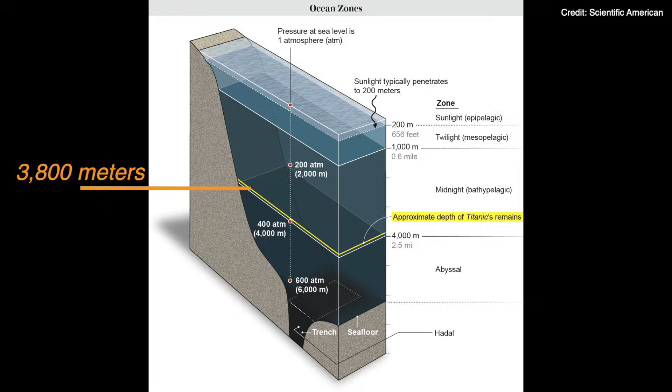The Submersible Titan was marketed as a revolution, a vessel born from the ideology of Silicon Valley: move fast and break things. But maritime engineering is governed by a different rule. Regulations are written in blood.

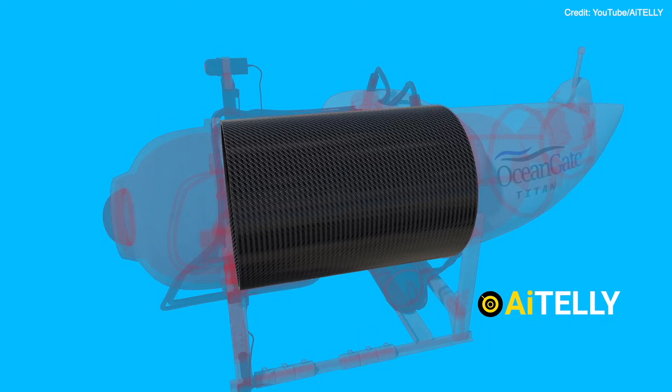This is not merely the story of an accident. It is a forensic timeline of a collision between hubris and the immutable laws of thermodynamics. It is the story of how 5 people were lost to a catastrophic failure of a pressure boundary that, according to established maritime science, should never have been built.

To understand the failure of June 18, 2023, we must look back a decade. OceanGate, founded in 2009 by 2 founders and led by CEO Stockton Rush, sought to democratize deep-sea exploration. Their initial vessel, Cyclops 1, was a steel-hulled refit. It was robust, proven, and limited to shallow depths. But Rush's ambition lay much deeper. He wanted the Titanic. Deep-sea engineering has a gold standard: the sphere.

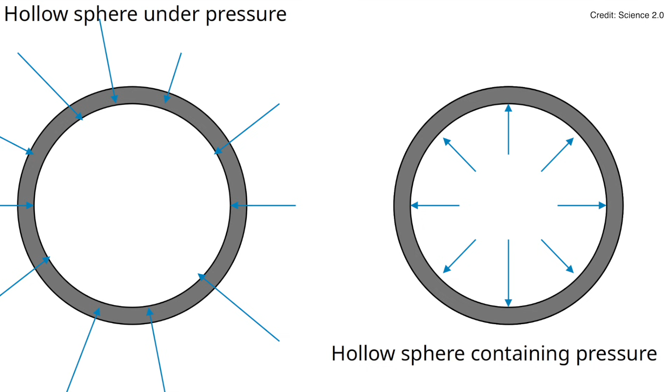Geometrically, a sphere distributes pressure perfectly evenly across its surface. It is the shape adopted by the Alvin, the Mir, and the Limiting Factor. However, a sphere is cramped. It limits passenger capacity and, by extension, ticket sales.

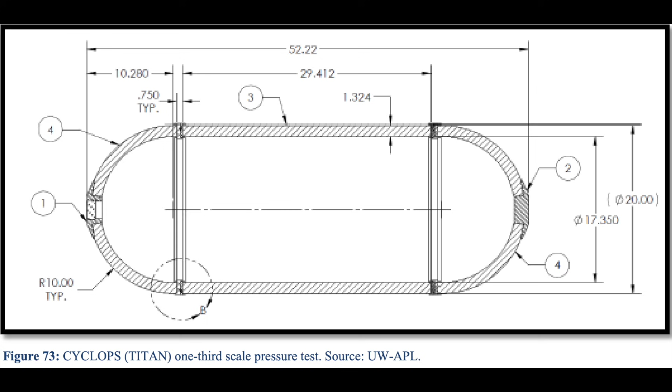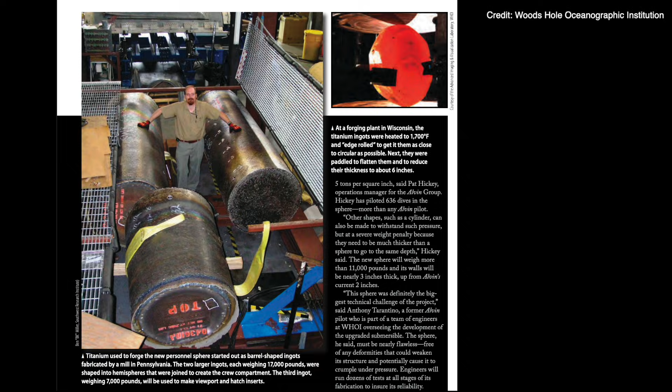To fit 5 people, a pilot and 4 mission specialists, OceanGate needed a cylinder. But at extreme depths, cylinders suffer from uneven stress distribution. To counter this, traditional engineering demands heavy titanium or high-yield steel. Rush, however, wanted the vessel to be neutrally buoyant and easy to launch. He turned to a material unproven for deep-sea compression: carbon fiber.

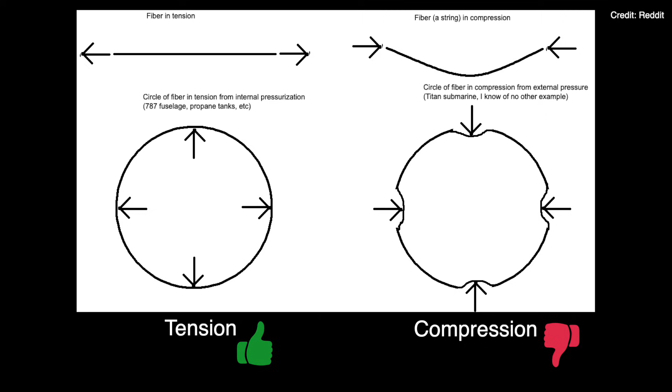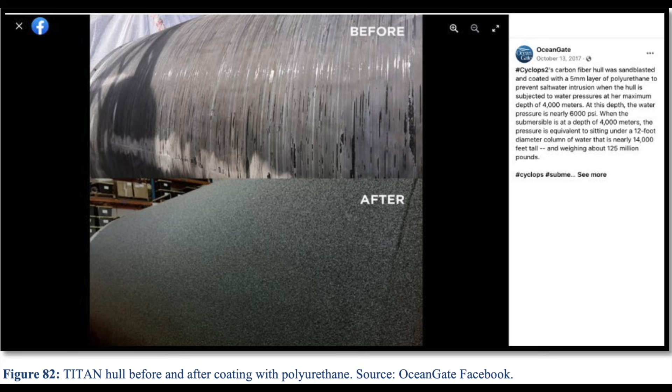Carbon fiber is a miracle material in aerospace, where it excels at handling tension, being pulled apart. But a submersible hull is under compression, being crushed inward. Using carbon fiber for a pressure vessel at 4,000 meters was not just unconventional. It was an experimental deviation from all classification society standards.

The warning signs were not subtle. In 2018, OceanGate's Director of Marine Operations, David Lochridge, authored a scathing report. He identified a critical flaw: the inability to non-destructively test the carbon fiber hull for delamination, the microscopic separation of layers deep within the material. Lochridge argued that without these tests, the hull was a ticking clock. He refused to sign off on manned tests. In response, he was fired.

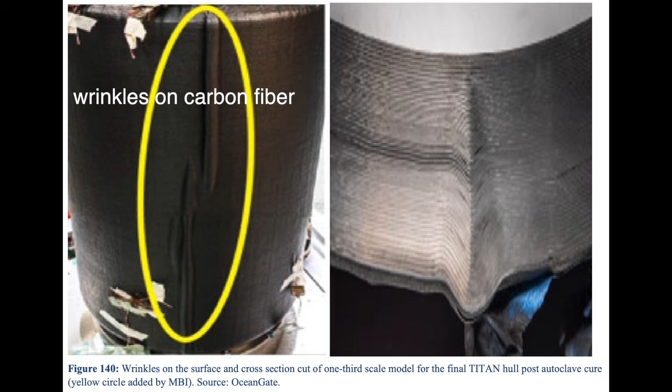Soon after, a letter from the Marine Technology Society, signed by dozens of industry experts, warned Rush that his experimental approach could result in a catastrophe. Rush dismissed these concerns as industry gatekeeping, stating that classing is not sufficient to ensure safety. Investigations revealed that the carbon fiber used for the hull was reportedly sourced from expired aerospace stock, material that had exceeded its shelf life for airplane use. OceanGate was betting lives on the assumption that what wasn't good enough for the sky was somehow sufficient for the crushing depths of the abyss.

June 2023. The support vessel Polar Prince departs St. John's. The atmosphere on board is a mix of high-stakes adventure and casual tourism. This was not a military operation. It was a commercial transaction.

5 souls prepared to board the Titan. Hamish Harding, a British aviation tycoon and seasoned explorer who had previously visited the Mariana Trench. Shahzada Dawood, a prominent Pakistani businessman, and his 19-year-old son Suleiman. Reports suggest Suleiman was hesitant, joining the expedition primarily to please his father over Father's Day weekend.

Paul-Henri Nargeolet, known as Mr. Titanic, a veteran French diver with over 30 dives to the wreck. His presence lent the operation a veneer of legitimacy. Why a man of his experience trusted the experimental hull remains one of the tragedy's most haunting questions. And finally, Stockton Rush, the architect of the vessel and the pilot for this mission.

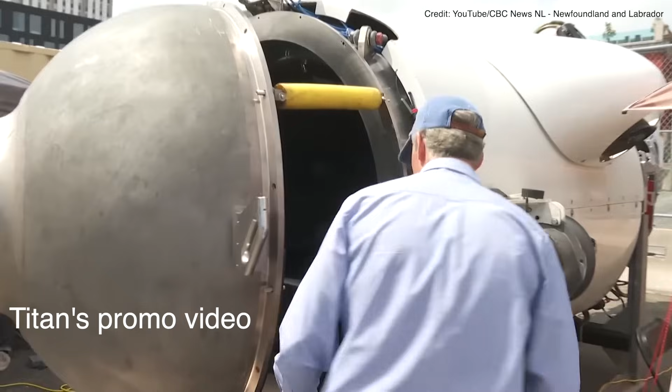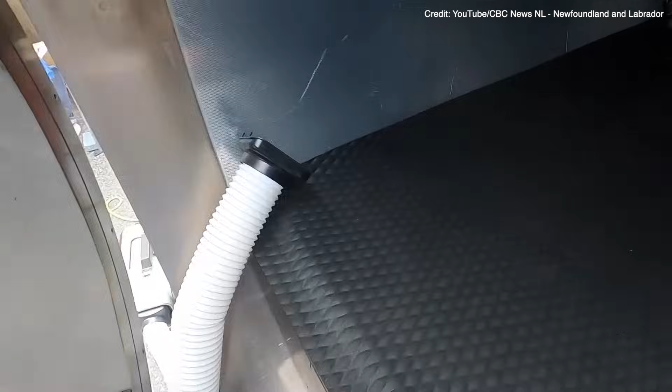Communication with the surface is maintained via text messages sent through an acoustic modem. There is no GPS underwater. The pilot relies on text instructions from the Polar Prince to navigate. For the first 90 minutes, the logs, released during the 2024 Marine Board of Investigation hearings, show a routine descent. All systems nominal.

Approximately 1 hour 30 minutes into the descent. Depth, around 3,300 meters. The pressure is now exceeding 330 atmospheres. The carbon fiber hull is compressing, shrinking by fractions of an inch. This is the hysteresis effect, the material straining under the load.

Suddenly, the Titan's proprietary real-time health monitoring system, the RTM, detects an anomaly. This system was designed to listen for the acoustic signature of cracking fibers. Rush had claimed this system would give the pilot enough warning to arrest the descent and surface. Evidence suggests the acoustic sensors began registering a crescendo of micro-failures. The hull was speaking.

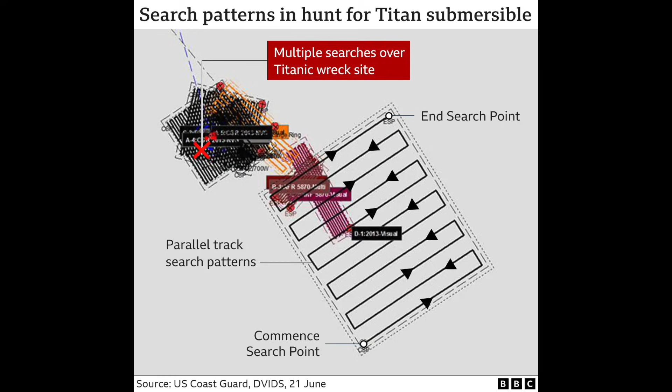But this narrative contained a fatal flaw. It assumed the pressure boundary was intact. The search covered thousands of square miles, and sonar buoys were dropped, listening for any sign of life.

Then came the banging noises. On day 2, sonar buoys detected rhythmic sounds, reportedly in 30-minute intervals. The media seized on this as evidence of human intelligence, survivors tapping on the hull, adhering to SOS protocols. It was a moment of profound hope for the families.

However, subsequent analysis by the Navy and Coast Guard debunked this. The ocean is a noisy place. The sounds were consistent with biological noise, whales, or the mechanical clatter of the search vessels themselves. The 30-minute interval was a pattern imposed by human bias, seeking order in the chaos. There was no one tapping. The silence had been absolute since Sunday morning.

Thursday, June 22nd. The oxygen clock had theoretically run out. The ROV Odysseus 6K reached the seafloor, 3,800 meters down. Within hours, the cameras picked up an unnatural shape in the silt. The debris was about 500 meters from the Titanic bow. It was the tail cone of the Titan.

Crucially, the pressure hull was missing. The debris field contained the titanium end caps, the landing frame, and fragments of the carbon fiber shell. This pattern confirmed the worst-case scenario: a catastrophic structural failure. We must pause here to understand the physics of this event.

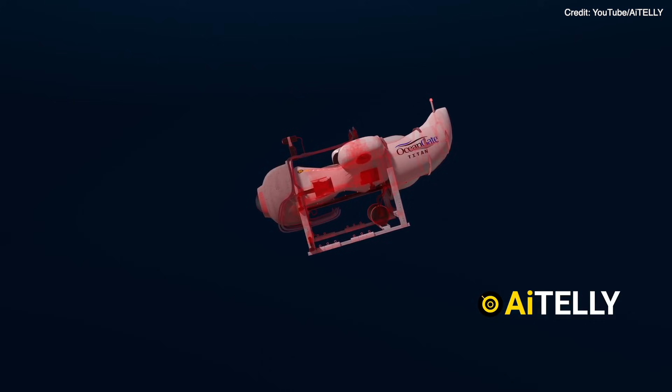When the pressure boundary failed, the external water pressure, roughly 6,000 psi, rushed in. The collapse of the hull happened in less than 1 millisecond. To put that in perspective, the human brain requires approximately 13 milliseconds to process visual information. The spinal cord requires even longer to register pain. The air inside was compressed adiabatically, generating extreme heat for a fraction of a second.

For the 5 men on board, there was no drowning. There was no suffering. Their existence ended before their nervous systems could even transmit the signal that something was wrong. It was a mercy of physics in an otherwise merciless event.

The recovery of the biological evidence and the wreckage marked the beginning of a forensic deep dive. The 2024 Marine Board of Investigation hearings laid bare the engineering realities that OceanGate had obscured. The primary culprit was inadequate engineering leading to delamination and buckling.

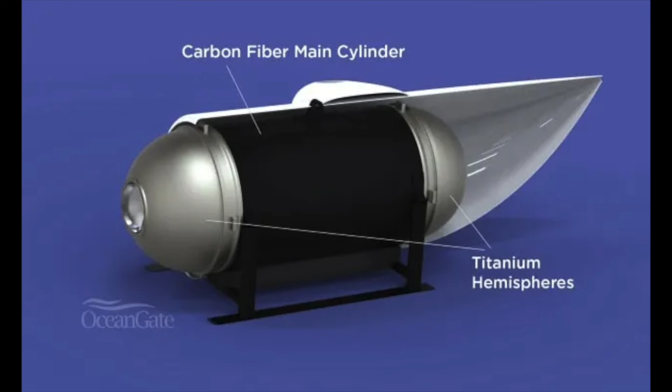Unlike steel or titanium, which can endure repeated pressure cycles if they stay within their elastic limit, carbon fiber composites degrade. Every time the Titan dived, the hull was compressed. When it surfaced, it expanded. This cycle caused micro-buckling in the epoxy matrix holding the fibers together. With each dive, the hull became weaker.

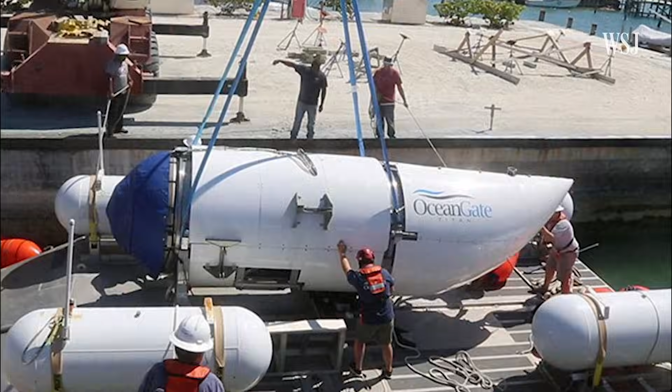Testimony revealed that on previous dives, the pilot and passengers had heard loud cracking or gunshot-like sounds. Rush dismissed these as the hull settling. In reality, these were likely the sounds of irreversible structural damage, delamination.

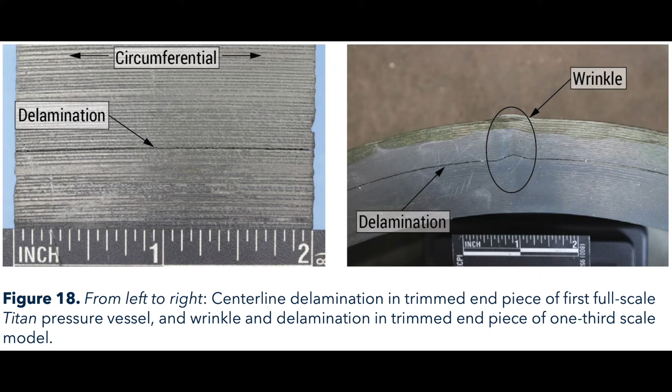Furthermore, the interface between the titanium rings and the carbon fiber tube was bonded with a specific industrial glue. The MBI investigation highlighted that the different expansion rates of titanium and carbon fiber created shear stress at this bond. Water intrusion at this seam may have initiated the collapse.

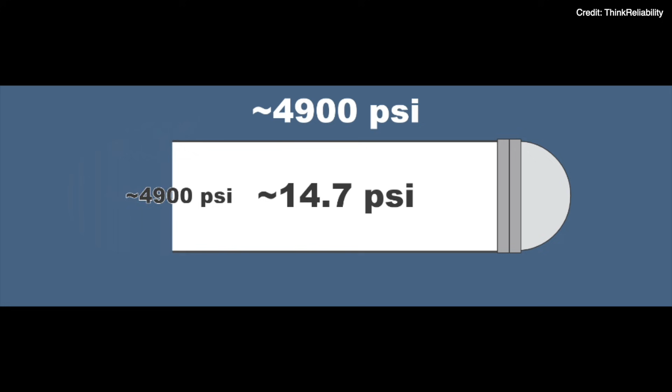The investigation concluded that the Titan was not failed by a single mistake, but by a cascade of negligence. The refusal to class the vessel, the reliance on acoustic monitoring instead of physical testing, and the dismissal of cyclic fatigue data created a probability of failure that approached 100%.

This tragedy forces us to confront uncomfortable questions about the nature of innovation. Stockton Rush often quoted General MacArthur: "You are remembered for the rules you break." He believed that safety regulations were stifling progress, mere red tape preventing humanity from accessing the deep ocean. But in maritime history, regulations aren't red tape. They are written in blood.

Every line in the SOLAS, Safety of Life at Sea, convention exists because a ship sank and people died. OceanGate attempted to bypass these lessons with a liability waiver.

So I want to ask you, where do we draw the line between being a visionary and being negligent? Did the passengers, Hamish, Paul-Henri, Shahzada, and Suleiman, truly understand the waiver they signed? Or were they blinded by the marketing of a company that conflated experimental with cutting edge? There is a difference between taking a calculated risk and taking a blind gamble.

The Titan was not testing a new technology. It was ignoring established science. And in the end, the ocean does not care about your mission statement. OceanGate has suspended all operations.

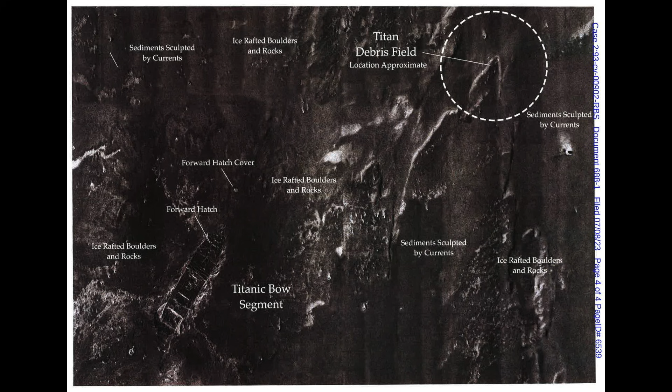The Titan is gone. But on the ocean floor, amidst the rust of the Titanic, there is now a new debris field. Two tragedies now rest within sight of one another. One caused by the hubris of the Gilded Age, believing a ship was unsinkable. The other caused by the hubris of the Silicon Age, believing physics could be disrupted like a taxi industry.

We remember the lives lost to the deep: Hamish Harding, Shahzada Dawood, Suleiman Dawood, Paul-Henri Nargeolet, Stockton Rush.